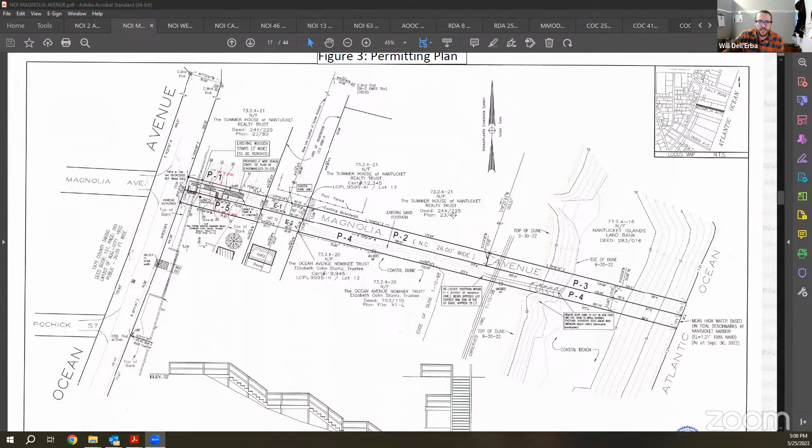Hi everybody, Will Dell'Erba here with the Natural Resources Department. If you'll remember from last meeting, this was a set of beach stairs and some path relocation and improvements. Rachel presented this at the last meeting. We were waiting on NHESP, so my presentation is very short. We now have NHESP, and that is all.

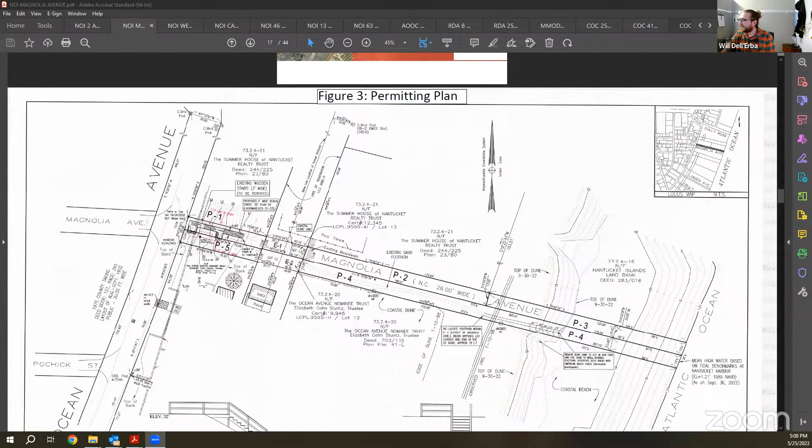I just want to confirm that members who were not at the last meeting to hear this have read up and are able to sit on this matter. Yes, Madam Chair, I watched the video and entered the appropriate forms to the Natural Resources Department, which should be part of the record. I watched the video but didn't enter the forms, so Will, I'll make sure I do that. Perfect. With only 4 of us on right now, I wanted to confirm.

Any questions or comments from commissioners? I think, sorry if this is out of line, but I think technically, if Ian hasn't sent in the form yet, he's not able to vote on this specific item. That is probably true, Seth, if we have 4 in total right now. I don't want us to get into another Mullin Rule legal issue.

So I guess this will have to continue then until our next meeting. Continue to next meeting or wait till the end? Yeah, unfortunately, send me the forms. Sorry, Linda, I also didn't mean to interrupt, and I take your point, Seth. Thank you very much, it was remiss of me, and I have loads of excuses, all of the dog-ate-my-homework varieties. So, Ashley, I'll spare you. All right, thank you.

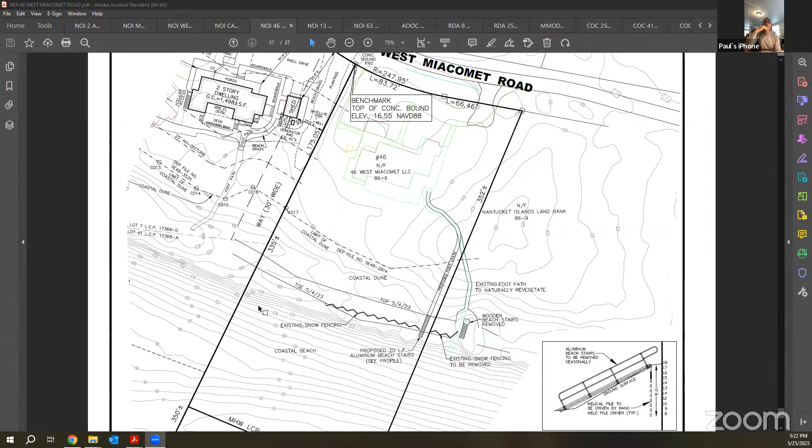Work is shown on the plan presently on the screen. Property is a residential property at West Miacomet Road. It is bounded on the east by land bank property, and in fact there's a historic path that cuts from this property over land bank property to the beach.

The intent is to stop use of that path, create a new path on the subject property, let the existing path on land bank property revegetate, and then create a set of seasonal beach stairs, aluminum beach stairs, one section approximately 20 feet in length, that would be put in to gain access to the beach.

There was a set of wooden beach stairs that had been placed on the land bank property that has since been removed, and there is some existing snow fencing as depicted on the plan that had been put in prior to the filing of this notice of intent. That is depicted on the plan before you.

The property does require review by NHESP. We do not have a response at this point. At the time the existing home was renovated some years ago, there was a no-take with conditions issued for that component of work, and that is included within the packet itself, but we are still waiting for word from NHESP.

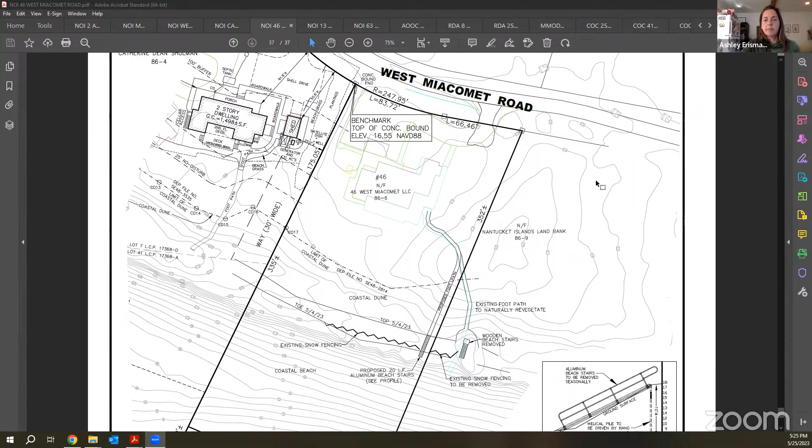Happy to answer any questions the commission or abutters may have. Thank you, Paul. Are there any questions or comments from commissioners? Seth, go ahead.

Thank you, Madam Chair. Regarding the snow fencing, I would request that we ask the applicant to remove that. If you look at the site photographs, you can see it's just the common roll-up wire fencing, which I think is an outdated technology and not a suitable measure. It's frequently breaking apart and causing wildlife impacts and wetland scenic view impacts. Since those are two of our protected interests, we should request that this not be covered by this permit, and that the applicant could come in with the more robust sand drift fencing or some other technique they would want to use. But I cannot support the snow fencing.

Thank you, Seth. I have to agree with you. I really am not a fan of snow fencing and find it dangerous within our beaches after big storm events, et cetera. So I would echo your request.

Any other questions or comments from commissioners? Looks like no. So we'll open up 46 West Miacomet LLC. Oh, Linda?

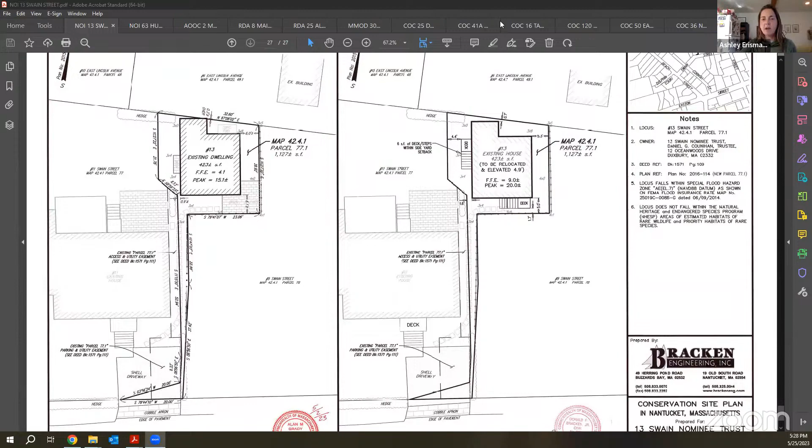That's pretty much it on this one, happy to answer any questions you might have. Thank you, Ryan. Are there any questions or comments from commissioners? Does not appear that we have any, so we'll open up 13 Swain Street for public comment.

It does not appear that we have any public comment. Will, do we have everything we would need to close? Yes, we do. Ryan, would you like to close? Yes, please. Is there a motion to close? Motion made, and seconded by Linda.

So by roll vote: Beal, Aye. Engelborg, Aye. Erisman, Aye. Golding, Aye. Klendowski, Aye. Williams, Aye. All right, that carries unanimously.

That moves us on to 63 Hulbert LLC at 63 Hulbert Avenue, represented by Mark Ritz. Good afternoon, Mark Ritz from Site Design, representing the applicants at 63 Hulbert.

I think I'm joined by Arthur Reed and possibly Dan Malloy will be popping in a moment. What you have before you this evening is a request to take an existing structure and elevate it outside of the 100-year flood zone. All work is being done within the existing structural footprint. We're going to put this up on a flood compliant pier foundation. The only changes in structural footprint will be additional wooden steps to accommodate the new height.

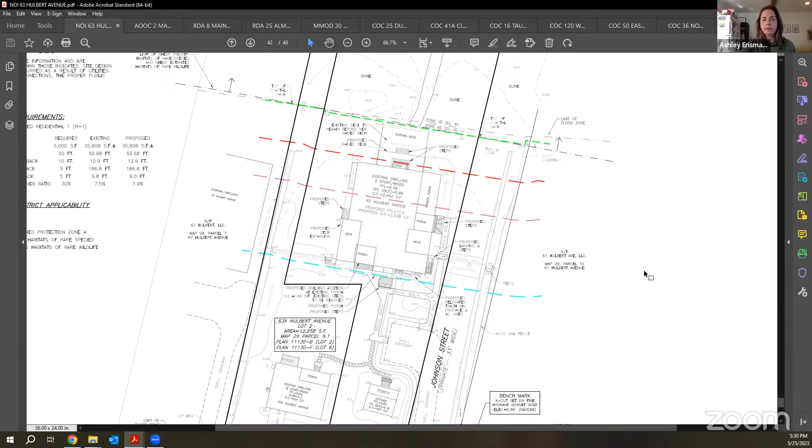Thank you, Mark. Are there any questions or comments from commissioners? Looks like no. So we'll open up 63 Hulbert for public comment. It does not appear that we have any public comment.

Mark, would you like to close? Please. Will, do we have everything we would need to close? Yes, we do. Is there a motion to close? Second, oh Ian, yeah, motion made by Joe, seconded by Ian.

So by roll vote: Beal, Aye. Engelborg, Aye. Erisman, Aye. Golding, Aye. Klendowski, Aye. Williams, Aye. All right, that carries unanimously.

This is represented by Paul Santos. So Paul, I'll give it over to you. Okay, thank you. Again, Paul Santos with Nantucket Surveyors on behalf of the property owner and applicant Doherty ACK LLC for a property located at 2 Mariner Way. This is actually the third hearing on this application.

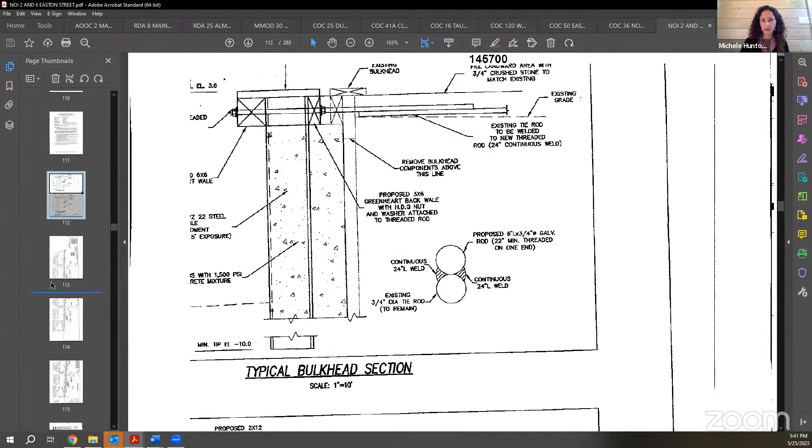I just wanted to start by requesting a waiver from the local regulations, given that the structures at the property are grandfathered and qualify as a pre-existing use under the local regulations. As the commission is aware, section 1.03 F3D of your regulations provides that the commission shall grant a waiver from these regulations when the work is grandfathered or qualifies as a pre-existing use, as defined in section 1.02 of your regulations. Going to 1.02, the definition for grandfathering and pre-existing use includes the use and normal maintenance of any structures that have been existing on a property prior to the enactment of the Wetlands Protection Act in 1972 and prior to the enactment of the Nantucket bylaw in 1983.

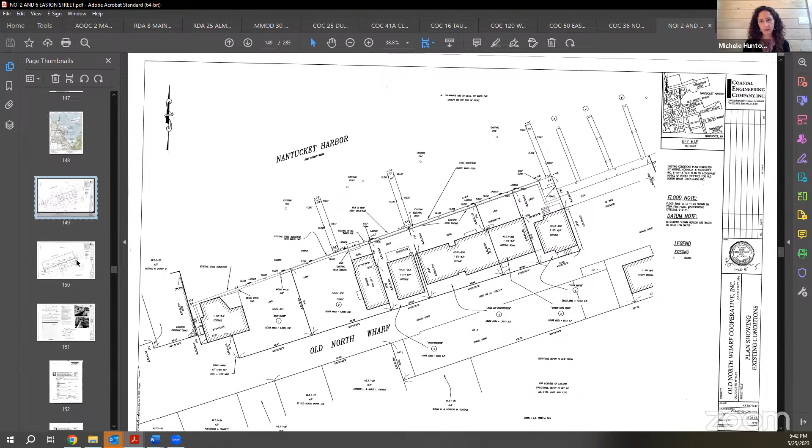So here, the proposed work, that again Cole Bateman will get into further detail regarding, includes maintenance work on the bulkhead, pier, gangway, and float that have been existing on the property since the 1950s. Cole will show you some aerials that we have showing that they were in existence at that time.

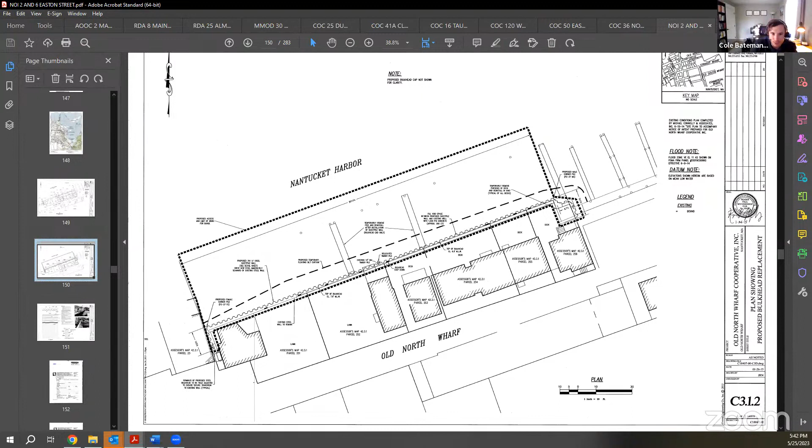Sorry, Will, is this the correct plan? Hi, this is Cole. Will, it's actually in the initial application, this is additional information, so it was in the other packet submitted initially. Thanks, I can't give you a page number, I apologize. If I may, I was going to have Cole share this when he presents, because I know there's probably more than a few specific pages. If he wants to screen share when he starts talking. Okay perfect, Cole, would you like to screen share? Sorry for all the interruptions. No, I was going to suggest that as well, that Cole is planning to share the plan when he gets into the detail.

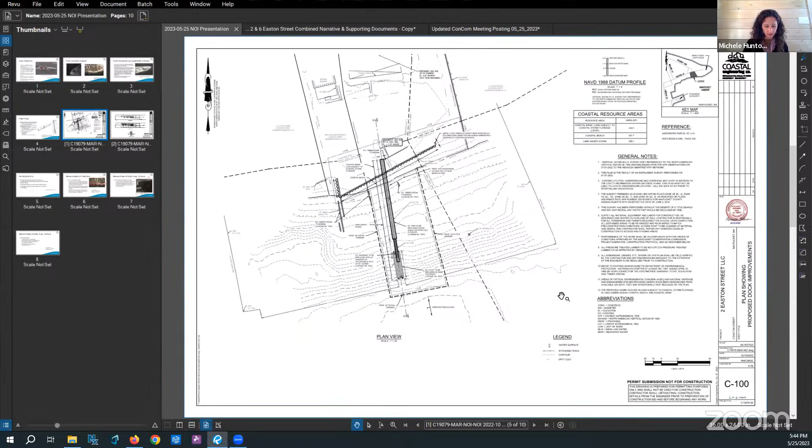I'm sorry, Michele, are you ready for me to take it? I have a couple more comments I wanted to make.

So we're requesting, as I stated, a waiver from the local regulations because this project fits within the definition of grandfathering pre-existing use. Under the regulations, the commission is required to grant a waiver given the language 'shall' is used. But given that, I just wanted to state that even though the local regulations technically don't apply to this project, we thought it would be helpful to the commission to still analyze all of the performance standards in your local regulations, as Cole has done in his notice of intent and Lee Wisher provided in his submission, to demonstrate how the project has no adverse effect on the relevant resource areas.

With regard to the Wetlands Protection Act regulations, we do understand that those still apply to the project. I did want to point out a specific performance standard with regard to coastal banks, which is the prohibition against new coastal engineering structures in 310 CMR 10.30. That provision only applies to new coastal engineering structures, and so it also doesn't apply to this project, given it is maintenance on an existing bulkhead. That's all I had to say for now. I'm happy to answer any questions, but I'll turn it over to Cole to get into the details of the work. Thank you.

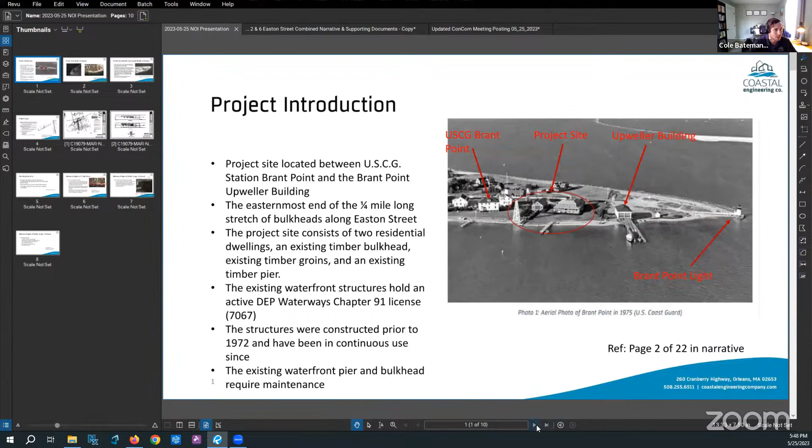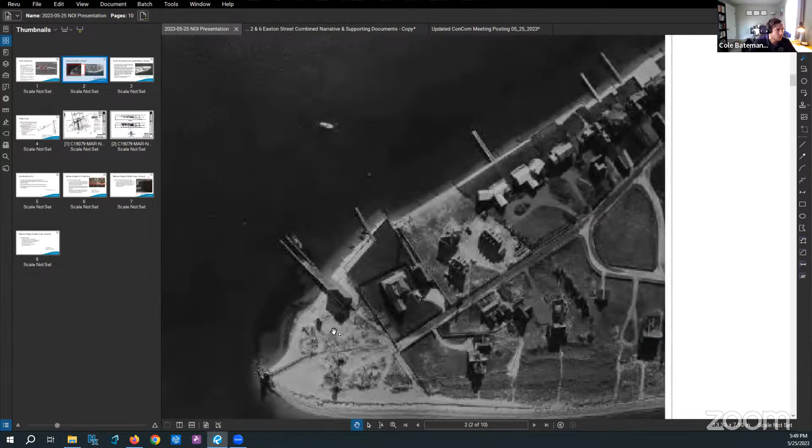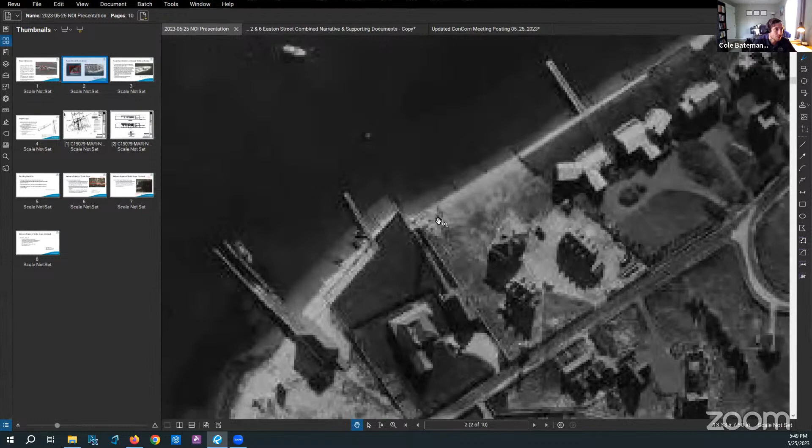For your reference, here is a historic photo from 1957 of the project site. I'll zoom right in. This is the Coast Guard station, this is our project site, and this is Brant Point. It's a mirror image of the orientation from the last picture. The bulkhead structure is delineated by this line, which wraps around and joins the Coast Guard bulkhead over here, and the pier is also located in this aerial photo. Again, this is from 1957.

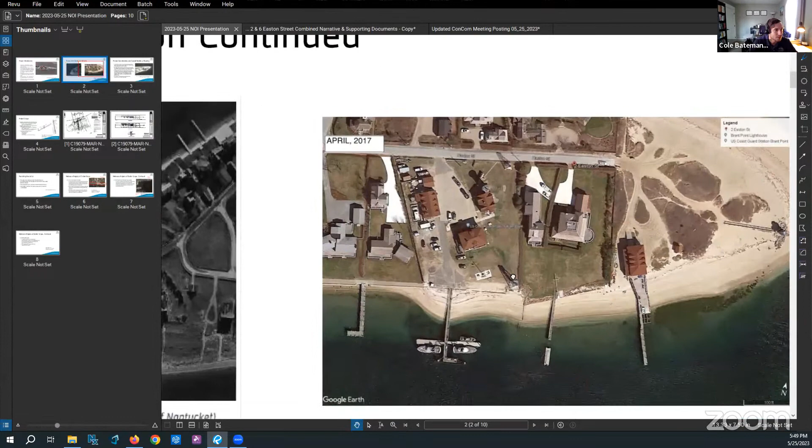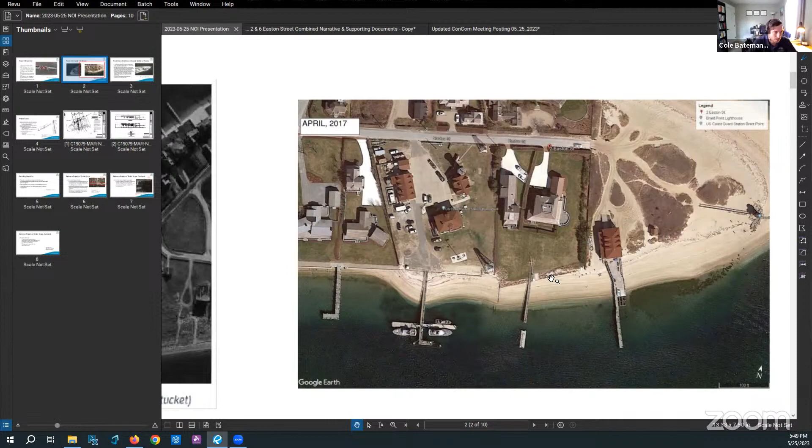A more modern, up-to-date photo taken from 2017 shows the bulkheads again, and the waterfront use structures. This photo, taken within the last six years, shows that the project has been in constant use since the original construction prior to 1957, which is one of the requirements for the grandfathering provision. You may find some of these photos in the narrative if you'd like to follow along.

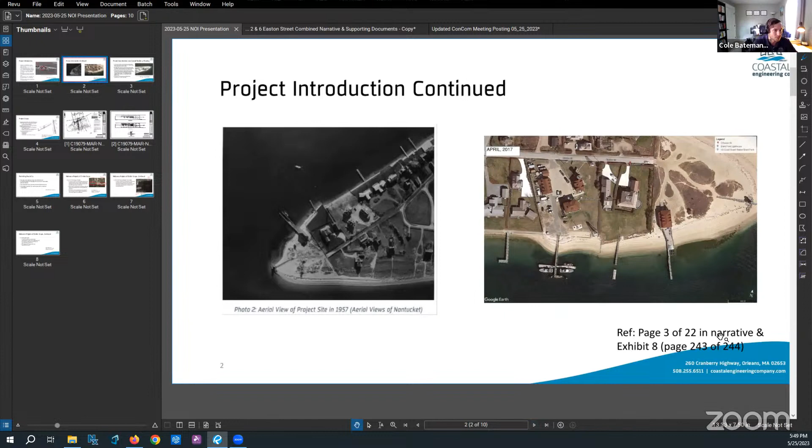One of the biggest parts of this project that we considered, which might not have been fully explained in our last presentation, is that this part of Nantucket, as identified in the Coastal Resiliency Plan, is one of the priority coastal risk areas under constant inundation. This creates issues both for residences along Easton Street regarding ambulance access and other emergency services, as well as for some critical facilities along this portion.

Within the CRP, the Coastal Resiliency Plan, it identifies the 5 most at-risk historical sites and 5 at-risk critical use facilities on Nantucket. At this project location, 2 out of the 10 are direct abutters, and the last one, Brant Point Lighthouse, is right here, very close to this project site. One consideration is how this project affects those 3 critical facilities.

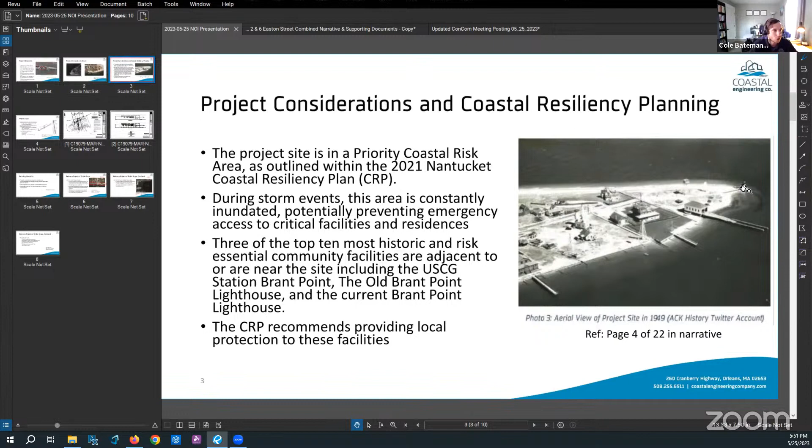Part of the CRP also recommends that homeowners provide their own local protection to protect their properties, alongside the long-term plans, whatever those might be for Nantucket. That's one of the project criteria we really tried to use while developing the proposed scope of work, which I'll identify soon.

As Michelle mentioned, the proposed scope consists of maintaining structures. There are 2 different structures identified in the scope of work. I'll start with the pier, which is a residential pier used for waterfront access. It's a water dependent use pier, both by definition in 310 CMR Chapter 91 for waterways, as well as the Nantucket bylaws.

The other structure is a bulkhead, a timber bulkhead, which is a coastal structure that protects the shoreline. It provides resilience for the shoreline and is part of the coastal bank.

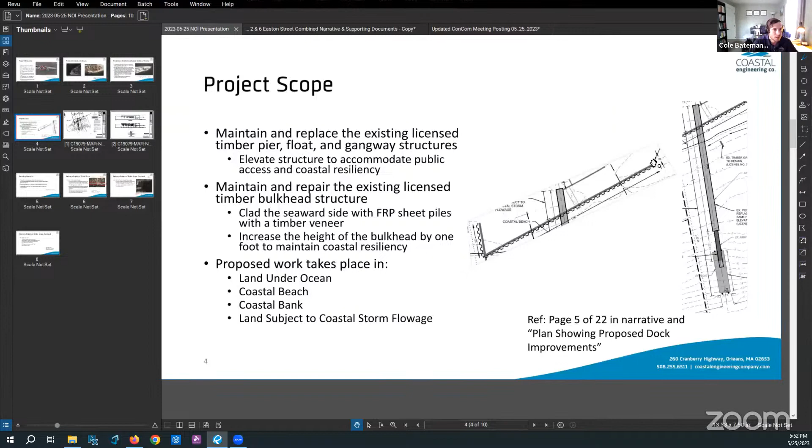The pier is being proposed to be maintained by replacing it in its existing footprint, and also raising it to meet coastal resiliency standards, as well as providing increased public access along the waterfront. Right now you cannot traverse the beach underneath the pier at mean high water.

So with this proposed project, it'll give significant benefits to the beach for public access, because there are quite a bit of walking trails as you come through the Upweller building to the east and down here, giving increased lateral passage along the beach.

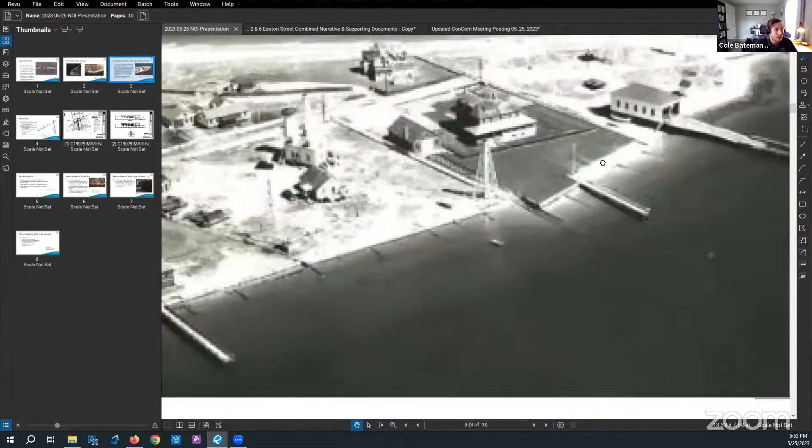For the bulkhead, the existing bulkhead is a timber bulkhead. Historically, in some of these more historic photos, it can be seen as a much more substantial face of the bulkhead exposed. Over time, the beach seems to have accreted, so now it's about a foot or two of exposed height. During coastal flooding, not even significant storms, the bulkhead is overtopped and the project site is inundated.

So what this project proposes is to clad the existing wall with a fiber reinforced polymer, or FRP—a synthetic sheet pile product—installed seaward of the existing bulkhead, and then cap the facade with some timber cladding, to hopefully make it more permittable through HDC, as well as blend in with the other aesthetic values of this already stated, very photogenic portion of Nantucket.

The resource areas affected in this project consist of the land under ocean, coastal beach, coastal bank, and land subject to coastal storm flowage. At this time, we're proposing to permit this under the grandfathering provisions, and as Michelle said, we did address each of these resource areas in the performance standards for 310 CMR, as well as the Nantucket provisions within the narrative. I won't get into those details now, but you're welcome to see them in the report.

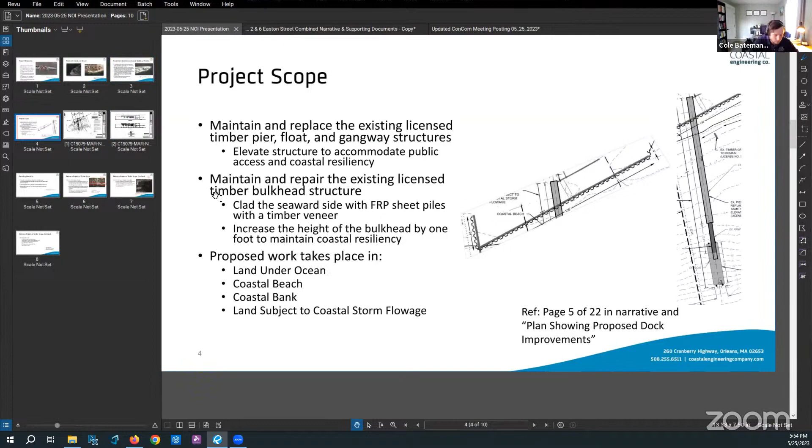This is the site plan, also previously presented to the commission with no changes from the previous submission to the current one. I've highlighted the majority of the project within this slide, but this is the plan that was submitted. As you can see, this is the bulkhead, and this is the pier—the pier spans towards the dwelling and spans over the bulkhead.

One of the points of this project is to replace both the bulkhead and the pier at the same time, for mobilization, and because they overlap each other—you really can't do one without doing the other, or you'd cause more harm to one of the structures by replacing it at a later date. Also included in the license, but not being addressed at this time, are these timber groins, which are staying as is.

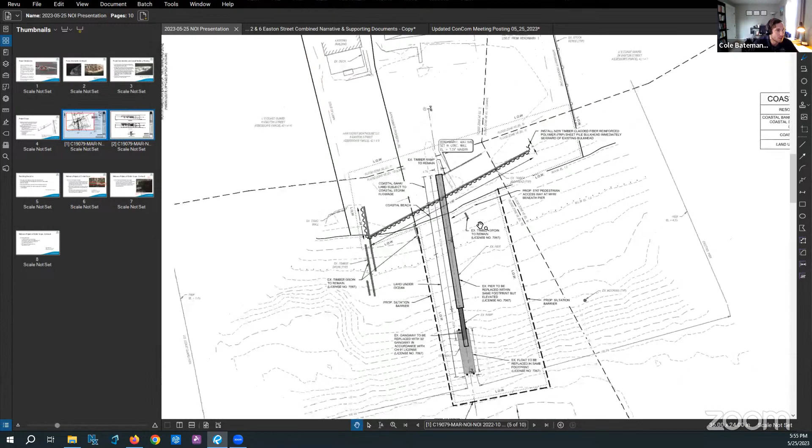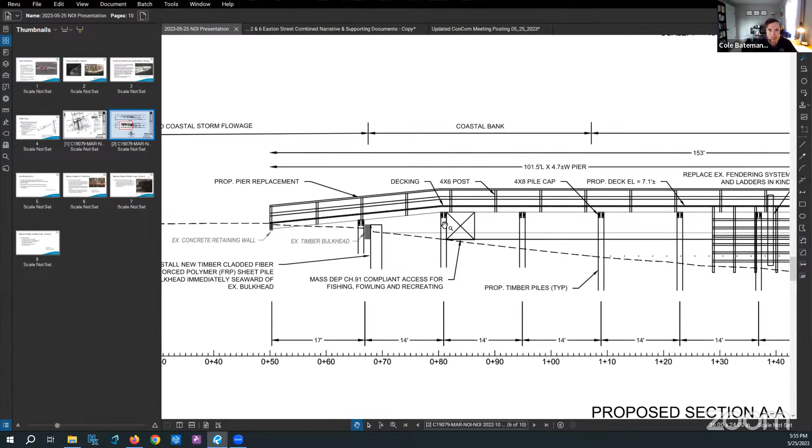The next slide shows the sections, a bit more detail of the proposed project. The most important part is really identifying that we are allowing for increased public access as part of this project criteria, which should also hopefully make this more permittable under the island perimeter regulations in the zoning bylaw, since this is a pre-existing use under those regulations as well—obviously outside the scope of the commission here.

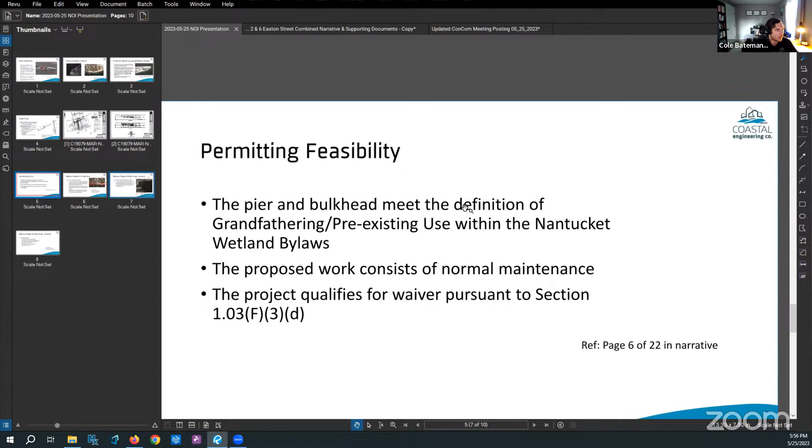With all that said, and as Michelle previously stated, we wanted to highlight how we believe this project could be permitted under the local Nantucket regulations, and how the commissioners have a way to permit this as currently proposed. The timber pier and the bulkhead meet the definition of the grandfathering provisions and pre-existing use, because they predate 1972, and the proposed work consists of normal maintenance. So we're requesting a waiver pursuant to this section in the Nantucket bylaws.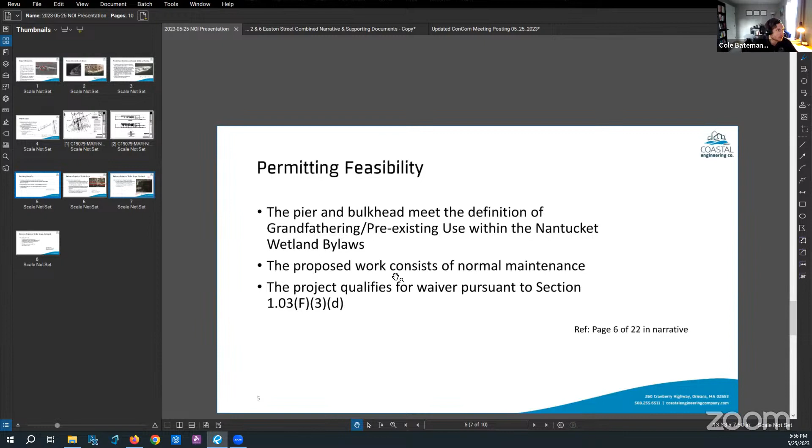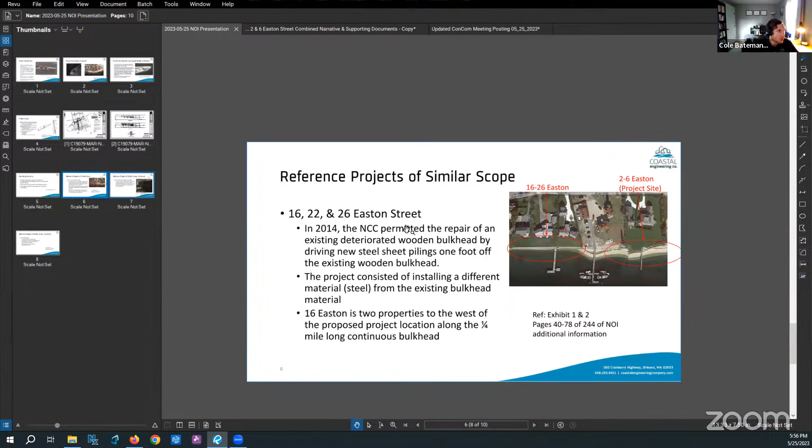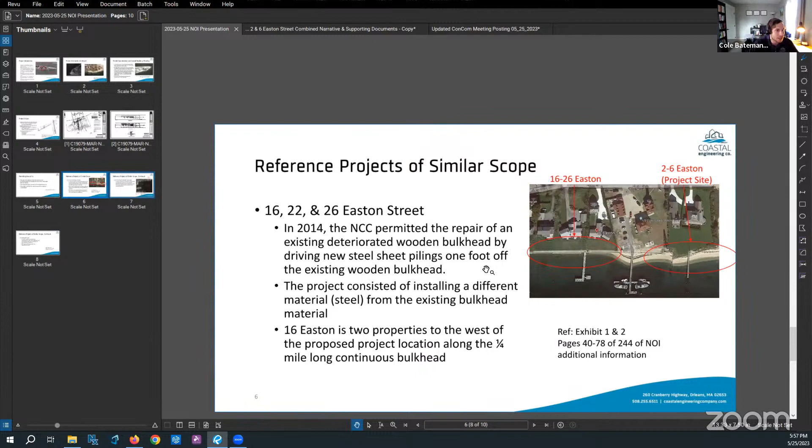Lastly, we'd like to make the commissioners aware of some reference projects previously approved, which could serve as a reference for approving this project as well. Of most significance is 16, 22, and 26 Easton Street, on the other side of the U.S. Coast Guard station from our project site, which consisted of essentially an identical scope, except for no pier.

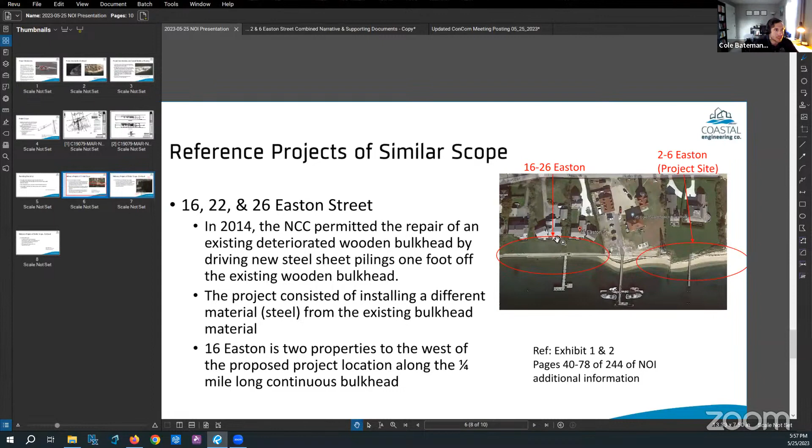In this photo on the right, we're showing the location of our project site at 2 to 6 Easton, and then this is 16 to 26 Easton, where this project took place. The order of conditions NOI consisted, in 2014, of repairing a deteriorated wooden bulkhead by driving new steel sheet piles, in that case, one foot off the existing wooden bulkhead.

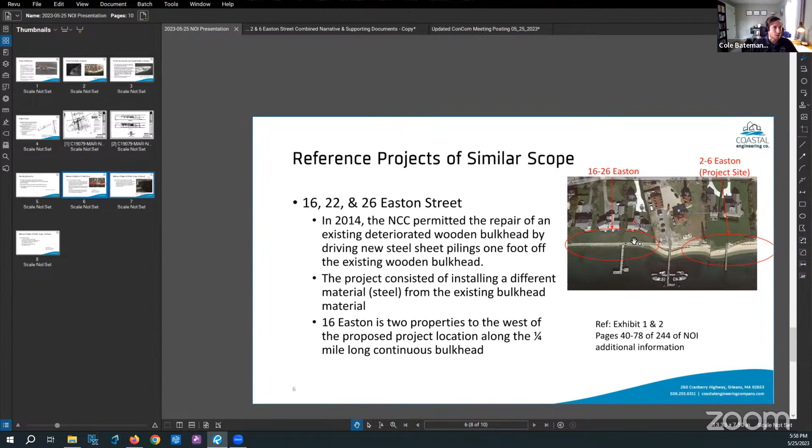Going back to our project, we're proposing installing fiber reinforced polymer in front of it and cladding it with a timber product, so we'd like to think this is almost like-for-like in terms of materials for aesthetic reasons—even more permittable than that project. Also, to reiterate, 16 to 26 Easton is part of that quarter-mile-long bulkhead.

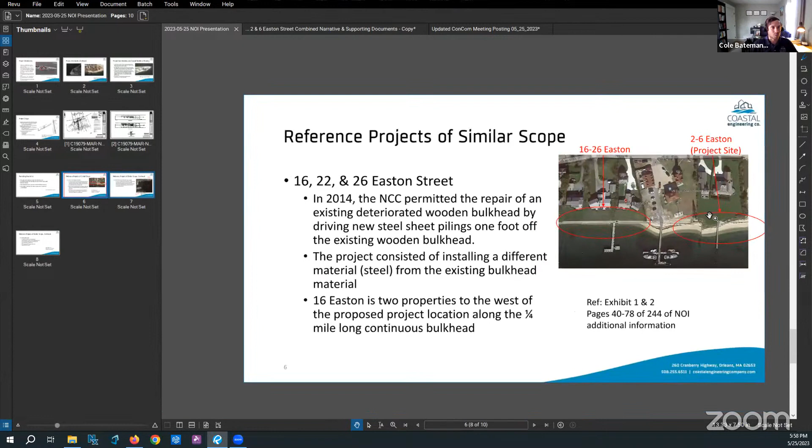And you know, it's really a chink in the armor to not have a bulkhead installed here, especially with those critical use facilities on either side of our project site.

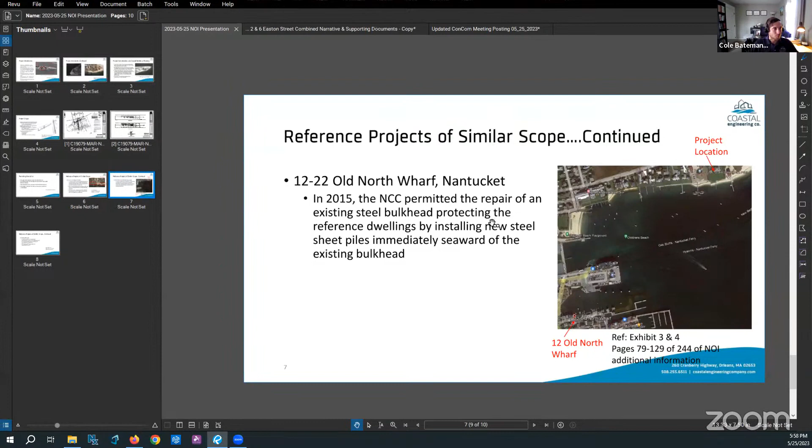Another reference project would be 12 to 22 Old North Wharf. This one was in 2015, which consisted of installing a steel sheet pile wall in front of a steel sheet pile wall. These are also within the additional material submitted and can be seen in exhibits 3 and 4. So a very similar project scope to the one we're presenting.

And lastly, a more recent one is 15 Hallowell Lane. This one's included as a reference project because it was a way for the commission to permit a project through the grandfathering provisions. We believe our project has a similar scope of work permitting-wise through the local Nantucket bylaws as this project, and therefore the commissioners should be able to grant the waiver based on this project and how it was handled through the permitting process. So that's the end of my presentation.

And I suppose we'll go to actually, I'd like to go to Michelle, please, unless you have any more comments to add there, Michelle. No, I'm all set. If the commission has any questions, we're happy to answer further questions.

Perfect. Thank you. Any questions or comments from commissioners? Ian. Yes, thank you, Madam Chair. So on your cross section, to whom should I address my question?

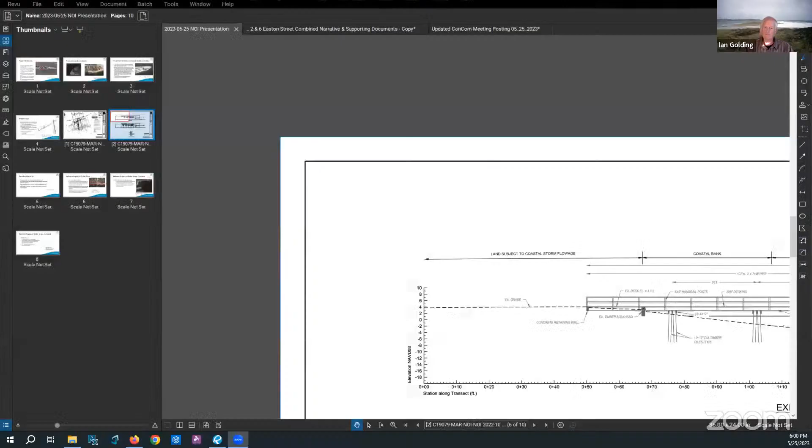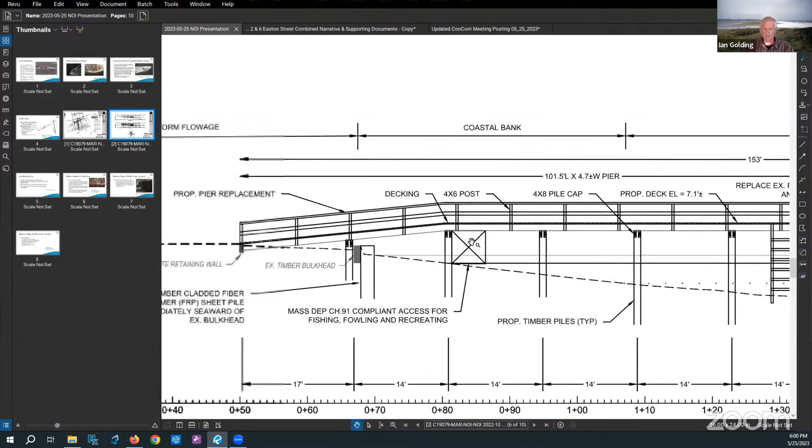You can address it to me, Mr. Commissioner Cole Bateman. So, Mr. Bateman, so on your cross section there, yes, can you increase the—actually the next page? So what I'm trying to angle at is the compliant access for fishing, fowling, and recreation that you showed. There you go. Thank you. So what's that?

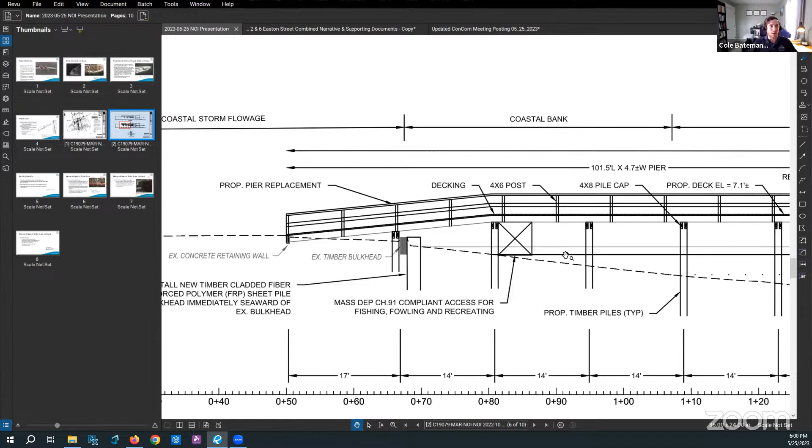The dimensions of that, approximately? That is just theoretical? That is a 5 by 5 square, and this line is mean high water. So it's a 5 foot wide by 5 foot high box, delineated at the mean high water line, the contemporary mean high water. And at mean low tide, which is where the legal requirement is, between mean high and mean low, you've got significantly higher, right? Oh, obviously, yes. I see, I'm sorry, I think we're going up 3 feet or so.

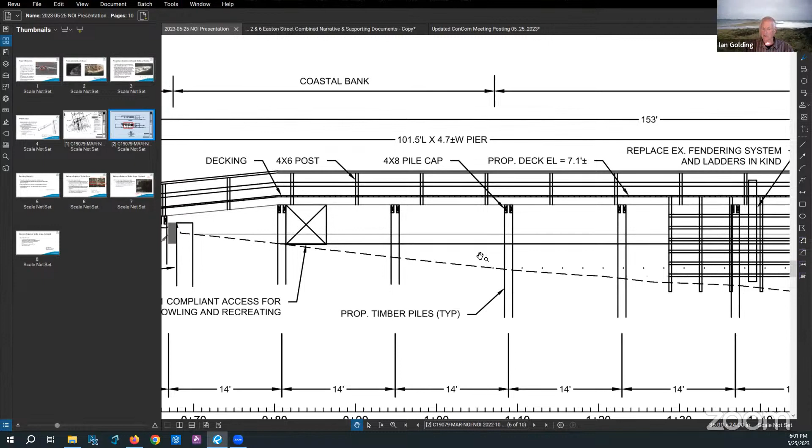And there's complete access under there as well, right? Yes, because this is at mean high water, and mean low water would be down here. That's correct. I wanted to, so thank you. Thank you, Ian. Seth, I had seen your hand go up.

Thank you, Madam Chair, and thank you to the applicants for their presentation. So I want to go back to the section about pre-existing use, because it's important to read what it actually says in that section. It says existing structures, uses, and/or alterations of land may not be extended and/or modified unless such extension or modification is permitted by a finding of the commission that such alteration or modification shall have no adverse impact. So independent of the discussion about impact for a second, let's just talk technically about what an extension or modification is.

So if you listen to the proposal and you hear that the pier is going to be elevated, the bulkhead is going to be elevated, that seems to me to qualify as an extension vertically. And then also, if you listen to the proposal and hear that there's going to be an FRP sheet driven in front of the timber bulkhead with that timber capping, that seems to me to be a modification.

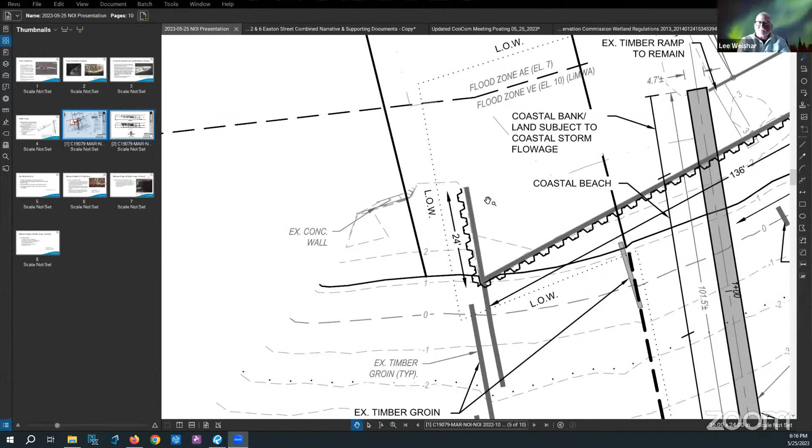And there's an existing concrete wall here. Can I actually please change it and ask if Lee would be able to respond? He had a site visit and documented this area. Lee, are you available to respond there through the chair? Sure, just make sure to state your full name and relationship to the project. Sure, my name is Lee Weishar. I'm with Woods Hole Group, and I'm a consultant for the project.

I went over and did a site visit and examined not only the Coast Guard - my examination only went to the Coast Guard and then further to the east. I didn't go past the Coast Guard facility. Our bulkhead is slightly lower than the Coast Guard facility, and so the proposed project would take it up probably 6 to 7 inches higher than the Coast Guard facility. But from a water perspective, the eye is not going to be able to tell the difference. It's not going to be like, oh, that bulkhead is really high. That's just not going to be the perception at all, because our bulkhead's lower than the Coast Guard right now, and will be just slightly higher than the Coast Guard after it's finished.

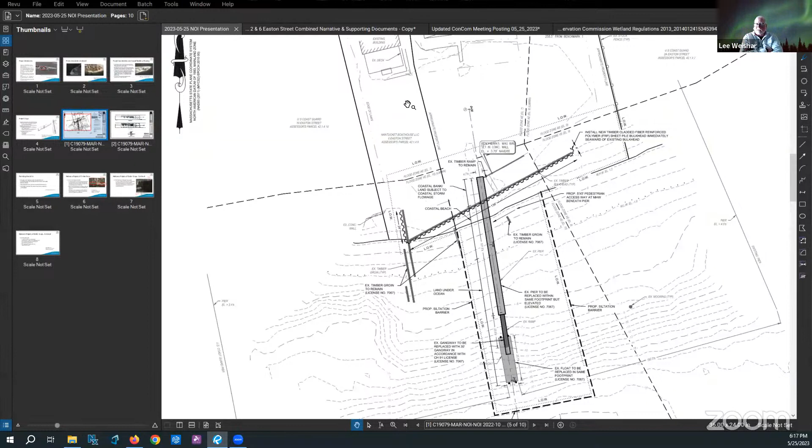All right, through you Madam Chair, just a comment - the ones to the west, a long string of them, they actually run into each other. They're attached to each other.

So they look the same height and they are the same type of bulkhead, and so it looks like one run all the way down to the White Elephant. That's what I'm trying to show, and I have a picture of this from the water, I just can't find it at the moment.

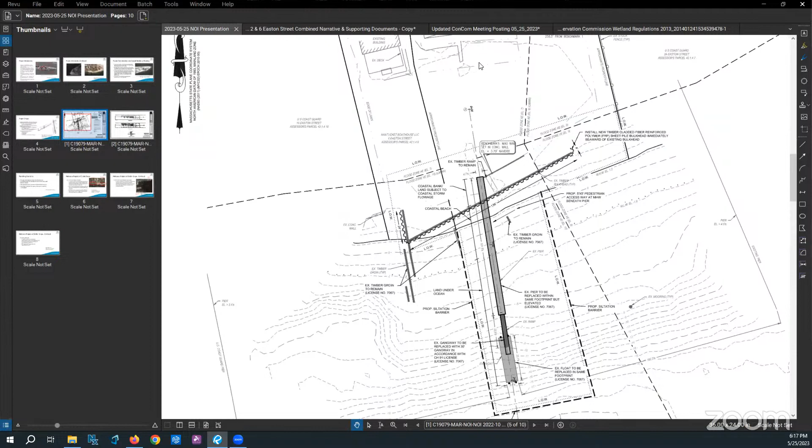Thank you, Madam Chair. Two comments in relation to Ms. Humpton's remarks, and then one question for either Mr. Bateman or Mr. Weishar. The first comment is that past decisions by conservation commissions don't compel future conservation commissions to do anything or to act in any specific way. I understand that we all have an idea of precedence, and there's a common use of that in the legal system, but precedence does not exist within the regulatory framework of the Conservation Commission. The Conservation Commission examines each project on its own, applies the relevant regulations, and bases our decisions on that and nothing else.

The second thing is related to the process of pre-existing use. I agree with parts of what you said, that the first thing to do is to decide if there's an extension or modification, yes or no. Then if yes, then to decide if there's any adverse impact. If no, then we can proceed with pre-existing use. If yes, then we go to the performance standards and the regulations. I don't know if we've really done that, Madam Chair. I think we've talked about it, but at some point before we move forward, we'll actually have to tick those boxes.

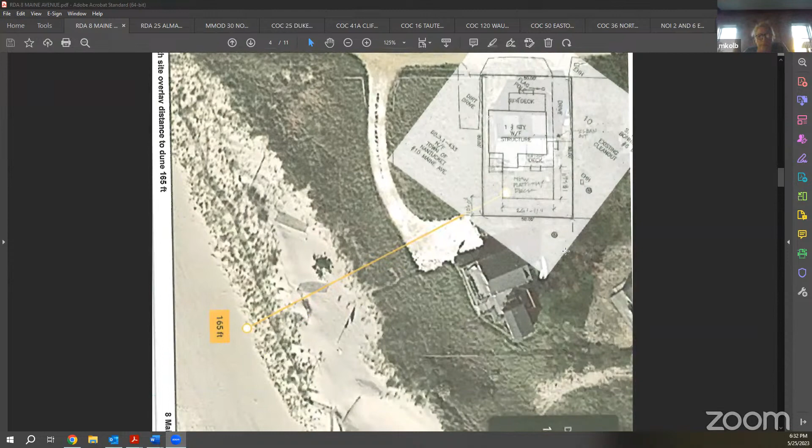Okay, I proposed a platform on grade at the HDC. The platform would be located approximately 165 feet from the dune. This is a Google Earth overlay of the site plan on the site. The other submission was a Google map, and the Google map shows it at 205 feet. The platform proposal was 18.6 by

26.11, and based on the HDC review today, it was requested that the width be cut down to 22 feet in width. But from the indication of this, it should fall outside the 100-foot.

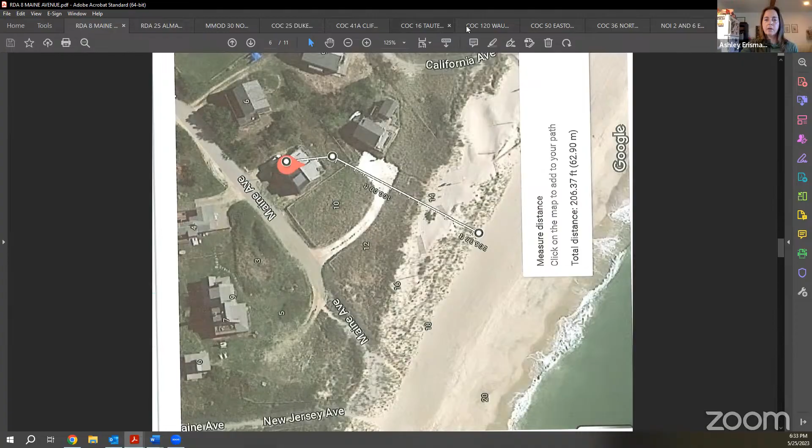So I believe this is within the land subject to coastal storm flowage. Is that correct? I checked because I thought so too, but it's actually perfectly around it. It's clear of LSCSF, and we did go out and measure.

And it's definitely over 100 feet away from the edge of where this porch is going to be. So in that case, what resource areas, if any, are we talking about? It's a -4 determination, so it's not in the resource area. I think this was just to make sure that she was not in the resource area. Thank you, Will.

Great question, Seth, because I was a little bit confused as well. Any other questions from commissioners?

If not, it sounds like Will's been out there and would recommend a -4, that this is outside of the resource area. So would somebody like to make that motion? It looks like Mark is making the motion. Is there a second? Seconded by Mike.

So by roll vote: Beal, aye. Engelborg, aye. Erisman, aye. Golding... oh, he froze. Mazzarelli, aye. Landowski, aye. All right, so that carries.

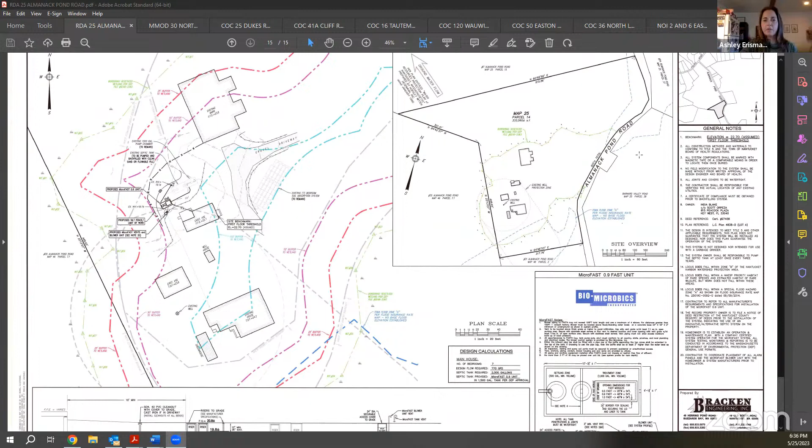And that's all I got for this one. I'd be happy to answer any questions you may have. Thank you, Ryan. Are there any questions or comments from commissioners? Looks like no. Will, have you been out and do you have a recommendation?

Oh, and you're muted. Sorry. Yes, we have been out there and it will be a -3 for our recommendation. So allowing for the work without a permit? Yes, indeed. Okay, if there aren't any questions or comments from commissioners, would somebody like to make a motion to issue a -3 to allow the work without a permit?

Motion made by Mike, seconded by Joe. So by roll vote: Beal, aye. Engelborg, aye. Erisman, aye. Mazzarelli, aye. Landowski, aye. Williams, aye. All right, that carries unanimously.

Thank you. Thank you, Ryan. And that moves us on to minor modifications. We have 30 North Beach Street LLC at 30 North Beach Street. And it looks like we have Brian Madden on for this one.

Hello, everyone. For the record, Brian Madden from LEC Environmental Consultants. The minor modification for the beachside involves some minimal driveway updates, driveway entrance updates, and some landscaping updates. You'll see on this sheet, just to recall some things that were previously approved: the two entrances within the interior off North Beach Street are being removed.

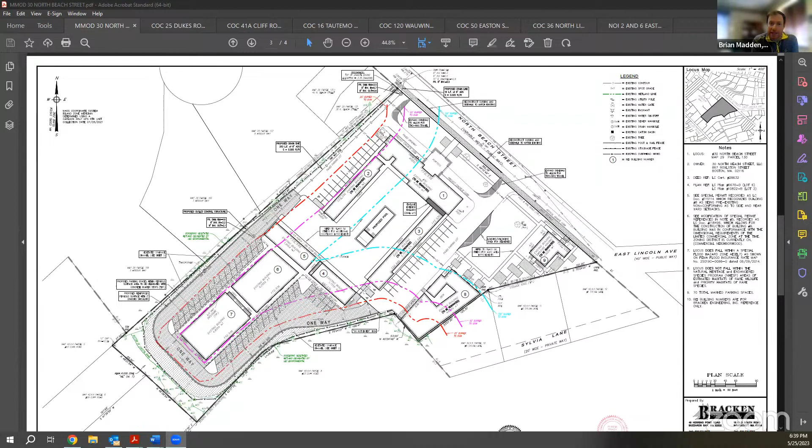And again, the project is removing approximately 26,000 square feet of concrete in the back there and replacing it with vegetated swales for stormwater management and replacing the traveled surface with a pervious surface. And then the final landscaping update, there's a series of dry laid stone patios and walkways between buildings 8 and 9 within the easterly, southeasterly, or northeasterly portion of the site. That's all outside the 100-foot buffer zone to wetlands, but is within land subject to coastal storm flowage.

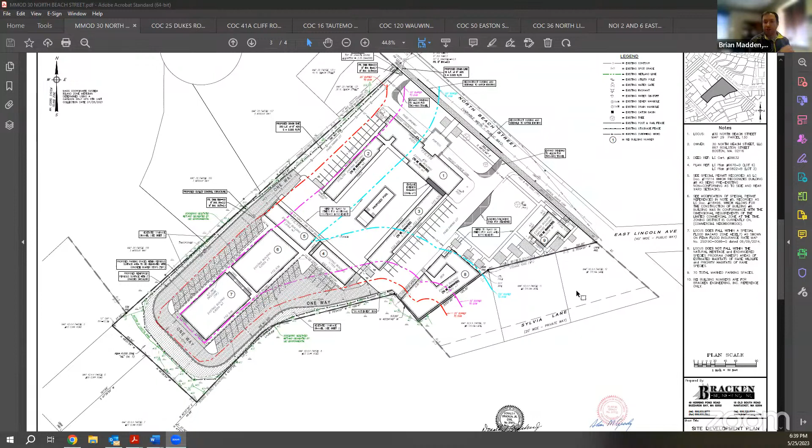And those are the updates. I'll be happy to answer any questions. Thank you, Brian. Are there any questions or comments from commissioners? All right, it looks like no.

Will, have you been out to the site and do we have everything we would need to issue the minor mod? Yes, and yes. Okay, perfect. Would somebody like to make a motion to issue the minor mod? Motion made by Seth. Is there a second? Mark got you on the Beal, got me. He got you, quick draw.

So by roll vote: Beal, aye. Engelborg, aye. Erisman, aye. Mazzarelli, aye. Landowski, aye. Williams, aye. All right, that carries unanimously. Thanks so much. Thank you, Brian.

And that moves us on to certificates of compliance. We have Lenhart at 25 Dukes Road.

Hi guys, I don't know if you want me to share my screen or not, but essentially we were missing a monitoring report last time. I'm just sharing this, and this is Chuck's letter, kind of in lieu of those reports that you can't travel back in time for, but I know I sent this around last week probably.

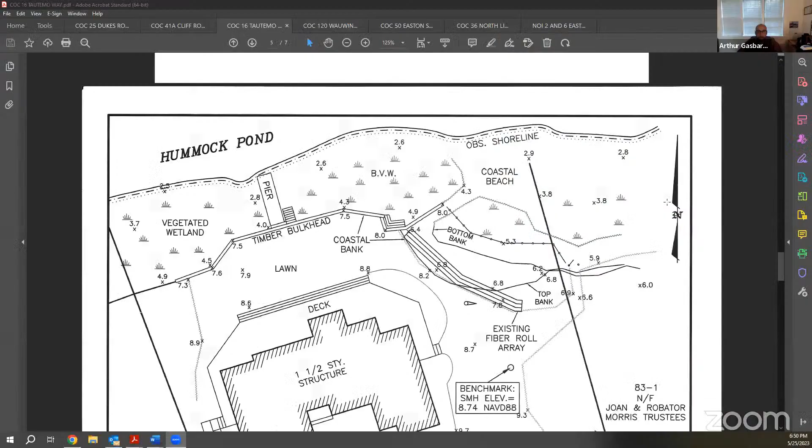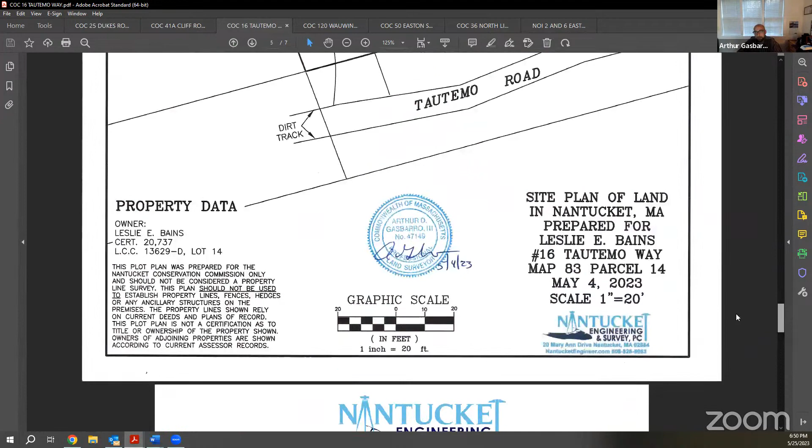Sure, thank you, Madam Chair. We are requesting a certificate of compliance. We did provide an as-built plan as well as a summary of what's gone on for a brief description. There weren't annual monitoring reports that were provided, but I did talk to the landscaper who has taken care of the project and who had done the plantings back in, I think it was 2017 or 18 when this went in, and they really haven't had to do any maintenance or had any issues.

Additional work that has had to happen down there in terms of monitoring -- everything has looked good down there. This was to add in just a couple of rows of fiber rolls adjacent to the existing bulkhead where there was some erosion. But again, it's been stable for some years, and it looks good now.

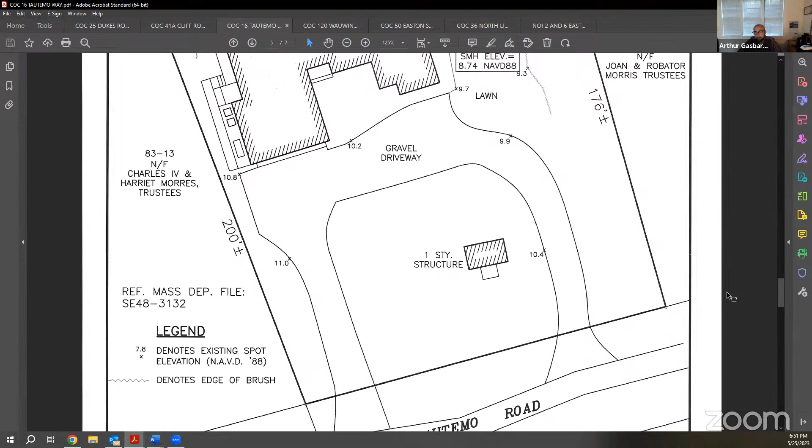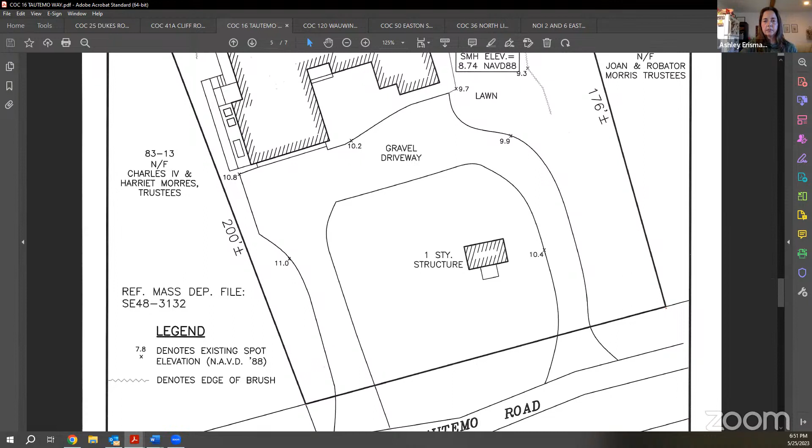Thank you, Art. Are there any questions or comments from commissioners? Looks like no. Will, have you been out to the site, and would you agree that we could issue the certificate of compliance? Yes, and yes, Ashley.

If there are not any questions or comments from commissioners, would somebody like to make a motion to issue the cert? Looks like Mike is making that motion. Is there a second? Sorry, Madam Chair, is there any ongoing conditions? Oh, I'm forgetting that again. Any ongoing conditions, Will? Sorry about that.

I actually wanted to ask about condition 21, I have it highlighted. The project area, defined as the area east of the bulkhead to the property line, shall be kept free of invasive species. Any treatment shall be no greater than clip and drip applications, with protocols provided to commission staff and any herbicide quantity reported to the commission. When I was out there, I didn't see anything alarming at all, but I just wasn't sure if this was a continuing condition that would be desired by the applicant or something like that.

I don't think they would want any ongoing conditions. Like I said, I didn't see any invasive species there either. And I'm not sure that would be needed, or I think it might be just another challenge for an area that's not problematic to sort of impose a compulsory type of condition like that. But I defer to the commission.

Thank you, Art. And I apologize for missing ongoing conditions two meetings in a row. Does anybody want that ongoing condition, or do we feel okay just closing out the cert? I'm okay to make the motion to close it out. All right, so Mike has made a motion. Is there a second?

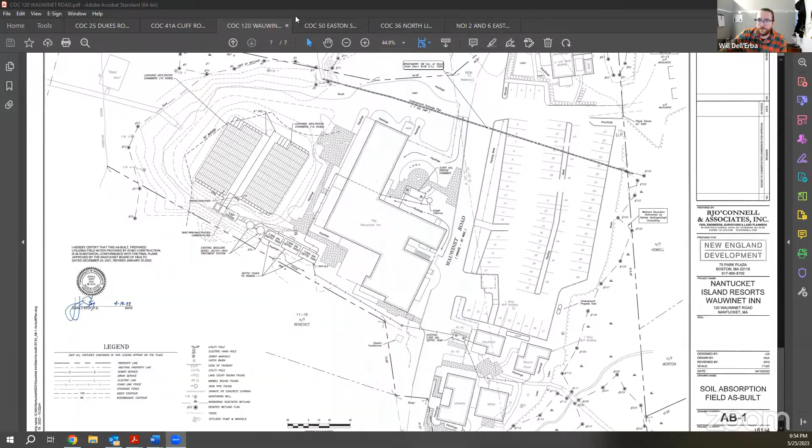This was a replacement of the existing septic system in the lawn facing the harbor from the Wauwinet, which was redone about 15-16 years ago. There's a certain life with these septic systems, and it was just the leaching field that was replaced. The BioClear units and the other tanks were not touched, so it was just a replacement in kind. Everything was done, and we're just closing things out. This is the as-built plan by RJ O'Connell. Everything went well, and we request a certificate of compliance, please.

Will, have you been out to the site, and would you agree that we can issue a certificate of compliance? Yes, absolutely. Any ongoing conditions with this one? This one does not. We had 18 and 19 general conditions. No need ongoing conditions. I have to remember to ask every time or I'll forget. So all good.

Would anybody like to make a motion to issue the cert? Motion made by Mark. Is there a second? Seconded by Mike. So by roll vote: Beal, aye - with that long trip, Will, I hope you got a cheeseburger out of the deal, but I'll vote aye. Engelborg, aye. Erisman, aye. Mazzarelli, aye. Landowski, aye. Williams, aye. All right, that carries unanimously.

Thank you. And that moves us to the White Elephant Hotel at 50 Easton Street, also represented by Catherine Barnacle. Great, thank you.

This is the White Elephant Hotel. We did dredging back in the 2016, 2017 season, and part of this is really just to close out the project. We like to keep dredging projects open in case we have to go back in, so we did wait some time and then we forgot to close it out - that's my bad. What I've submitted to you is the certificate of compliance information that we submitted to Mass DEP as part of the water quality certification, which was required to be submitted immediately after the dredging. So I just attached that to our request for certificate of compliance. Everything went well, it went according to plan, everything was removed off site, and we're just trying to close out this file.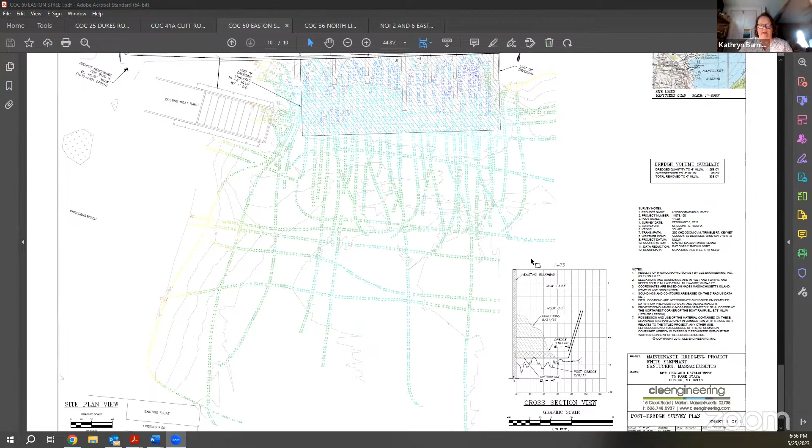Thank you. Any questions or comments from commissioners? Looks like no.

Will, have you been out to the site, and what would you recommend here? I took a swim and checked - no, I'm just kidding. I've been out there, but I reviewed the plans and also showed them to Vince Murphy, and everything looks fantastic. I'm assuming no ongoing conditions with this one. No ongoing conditions, I meant to say that before you had to ask.

Perfect. Would somebody like to make a motion to issue the cert? Motion made by Mark and seconded by Mike. So by roll vote: Beal, aye. Engelborg, aye. Erisman, aye. Mazzarelli, aye. Landowski, aye. Williams, aye. All right, that carries unanimously. Thank you very much.

And that moves us to Liberty Realty Trust at 36 North Liberty Street. Will, are you going to take this? Because it looks like Ryan Maxwell jumped off. I'm not sure we have anybody here for this, but that's fine.

This OOC was for the removal of some steps and a stoop to the house, construction of a new porch and new steps. This was in the buffer zone to an isolated vegetated wetland. Let me bring the plan up, or I'll bring the photos up. I've been out there upon inspection - everything looks good, everything is as it's supposed to be, and there are no ongoing conditions for this project.

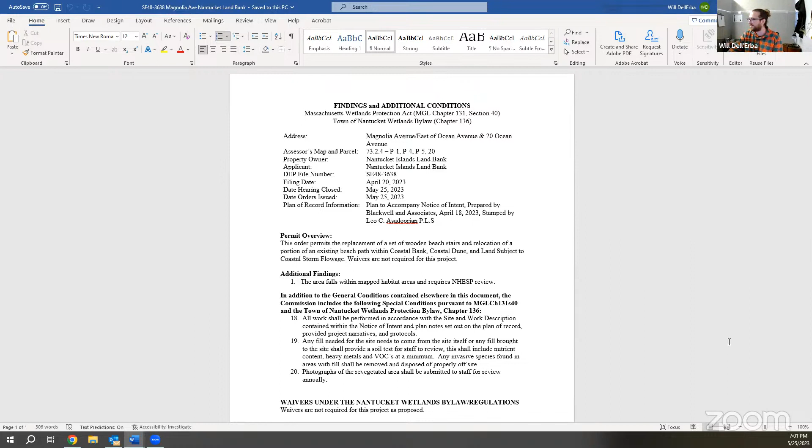Commissioners, any questions, comments, or amendments? Mike? Yeah, go ahead. I wasn't here in the beginning of the meeting, so I should probably not vote on this one. But did I? Yeah, I think you are actually absent from all four of these, if I have it marked down right. I was trying to keep track. Yeah, how convenient of me. That would be right. Okay, but we thank you. Forgive you.

But I thought if he sat on one of them, like he should be able to hear Land Bank and Conservation Foundation, can't you? Oh, you have to still read in. Sorry, yeah, you probably have to read in. That's fine. Yes, Mike, you'll have to sit.

Again, any questions, comments, or amendments for the Magnolia Avenue, Ocean Ave? And if not, would somebody like to make a motion to issue the order as drafted?

So moved, Madam Chair. I think Seth got you with the motion. I'll give you the second, Linda. So by roll vote: Beal, aye. Engelborg, aye. Erisman, aye. Mike, are you just gonna abstain? Yeah, I'll just abstain. Okay. Plandowski, aye. Williams, aye. All right, so that carries with Commissioner Mazzarelli abstaining.

And that moves us on to Nantucket Conservation Foundation at Capaum Pond. All right. Got some reading to do.

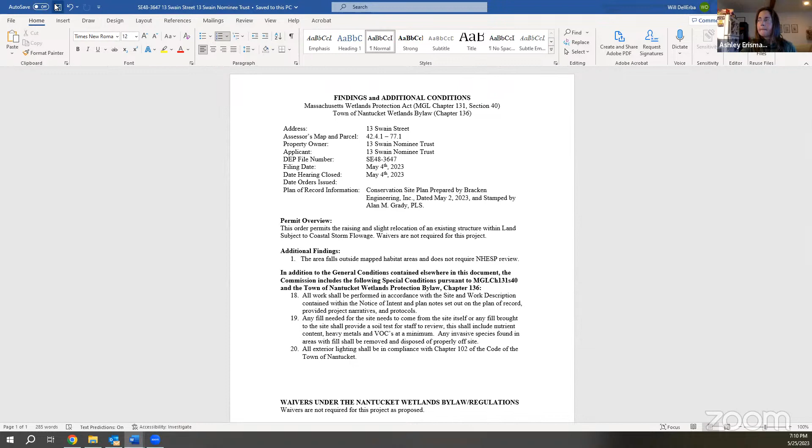And that moves us on to 63 Hulbert LLC at 63 Hulbert Avenue. This order permits the elevation of an existing SFR, construction of steps. I think we should throw the lighting condition in. But was there anything else?

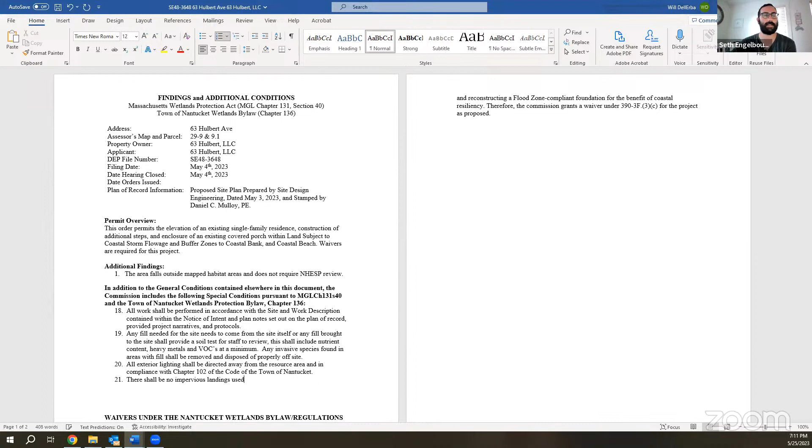Seth? Thank you, Madam Chair. In regards to the steps, can we please put a condition that says there should be no impervious landings for the steps, like concrete pads at the bottom or whatever else may be. They just need to use a pervious landing so that we're falling within the land subject to coastal storm flowage performance standards for retaining the ability to absorb and contain flood water. Thank you, Seth.

Any other questions, comments, or amendments while Will's typing? It looks like no. So would somebody like to make a motion to issue as amended?

Motion made by Joe. Is there a second? Second, made by Linda. So by roll vote: Beal, Aye. Engelborg, Aye. Erisman, Aye. Mazzarelli, Abstained. Plandowski, Aye. Williams, Aye. So that carries with Commissioner Mazzarelli abstaining.

Thank you, Will, for going through those with us. That moves us on to extensions of orders. We do not have any this evening. So we're on other business.

So Will, enforcement actions or potential enforcement actions? I don't have anything new tonight. We do have one - I believe it was for the June 8th meeting, but I'd have to double check that right now. But we have the one from Wauwinet with the fence that was constructed. So we'll be hearing that at our next meeting, but nothing new to present tonight.

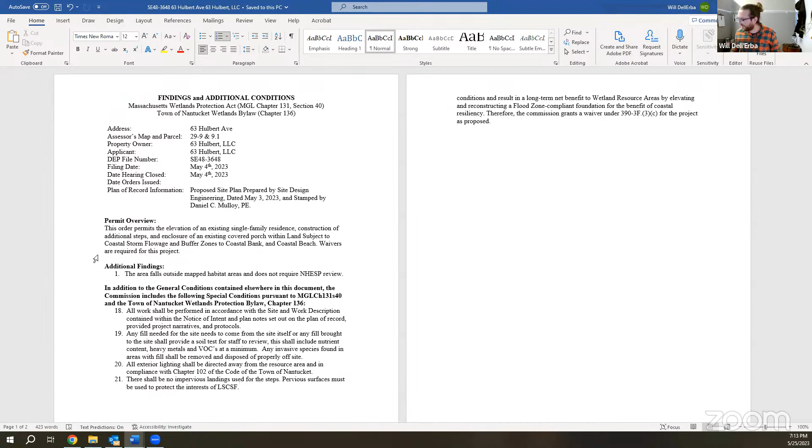Okay, thank you. And could you stop the screen share when you get a chance? Oh, yes, my bad. All right, and then I'm sure this reminder will come up again, but we do have an enforcement discussion scheduled for June 1st as well.

So that moves us on to Martin McGowan, Millbrook Road enforcement. And I know Marty is on to speak to this one, but we're here to discuss the grading of Millbrook Road within wetlands and wetland buffers. There's been contaminated fill material dumped within wetlands, and sedimentation within the wetlands and clearing of a wetland ditch and vegetation, all without the benefit of a permit.

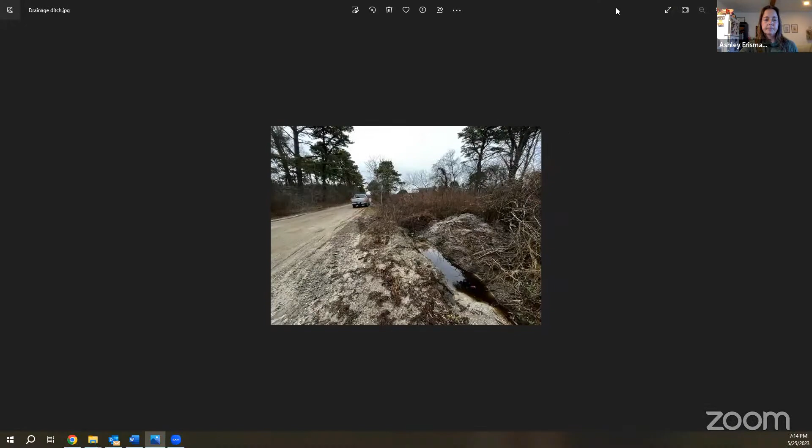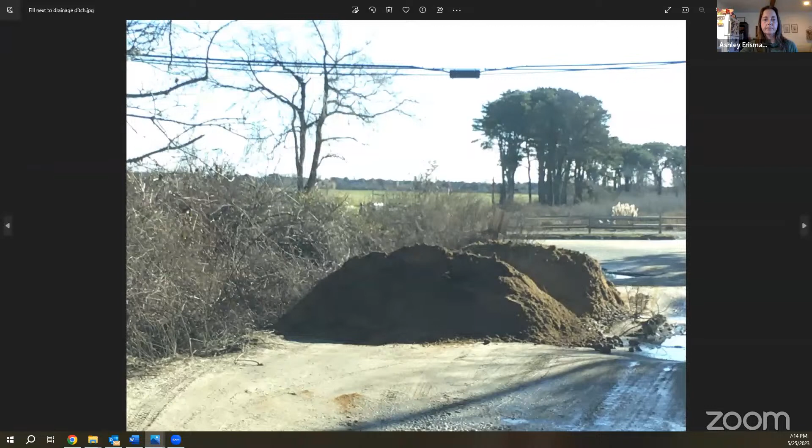Sorry about that, Ashley. Trying to quickly jog everyone's memory with pictures. No, I think that's good.

Currently, especially the little wetland that's by Pumpkin Pond, there's still contaminated material that looks like it has bits of shell, rock, and other fill that we would not want within the wetland buffer. That's remaining from a dump pile that was taken around the time of those photos.

So Marty, I know we have you on. It would be great if you could speak to what you've been doing there historically, so that we can take the proper course of action. Can you hear me? Yes, we can hear you. We don't have picture, but we can hear you. Okay.

So for 20 plus years, I've been grading the road. Sometimes I dump product there and grade it myself. Sometimes people drop off loads and I use it. Sometimes people drop loads and I don't know where they come from, and I let them sit around until they sit around too long. And then I just use them. Sometimes I use them and someone yells at me.